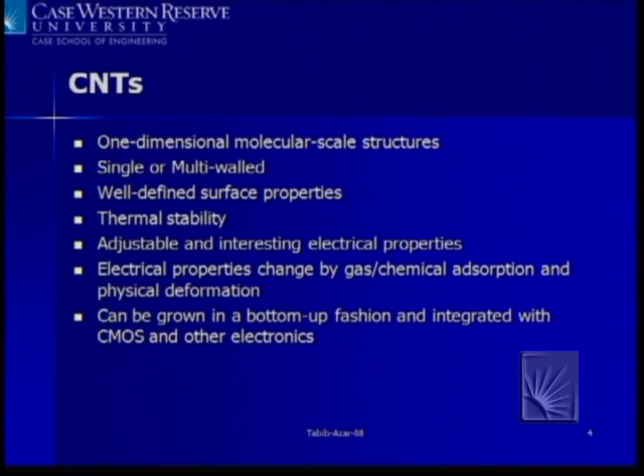So most of the nanotechnology work that I'm interested in and I work on, I don't really want to eliminate anything. I just want to use whatever exists and make them better by adding this nanotechnology stuff.

So key properties of carbon nanotubes are here. So the band gap: you can have semiconducting and metallic ones. Semiconducting ones have a kind of semiconducting-like behavior. So they have a band gap that is kind of proportional to 1 over d, and d is the diameter of the carbon nanotube. And they can withstand large current densities. You can pass large current densities through them, and they don't deteriorate, which is a great thing. And you can now grow them. This is old. We can grow them up to 10 centimeter or so in a continuous manner.

So they're hair-like structures. The aspect ratios are amazing. So you start with something that is, let's say, 1 nanometer or 50 nanometer diameter, and you grow them for up to 10 centimeter. Think about it in terms of aspect ratios. It's a highway that can run around the globe a bunch of times. That's the aspect ratio, right? So they're amazing stuff in that sense, and given that they are very stable and you don't need to do lithography to grow them, makes them really interesting. And they have pretty good thermal conductivity, and they can withstand large strains.

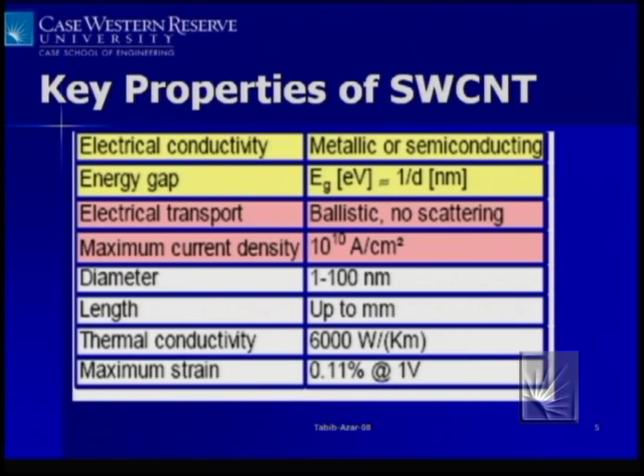So carbon nanotubes have been around for some time, 15 years or so. People have learned how to grow them easily. Most of the work that existed before we got into this was based on post-processing. So you would grow carbon nanotubes using one process, and then you add them to your structures in some fashion. And if you want to do this in a very controlled environment, you need a nano manipulator, atomic force microscopy of some sort. And it takes lots of time, and the yield is very low. So there is no really added value per se for general purpose applications.

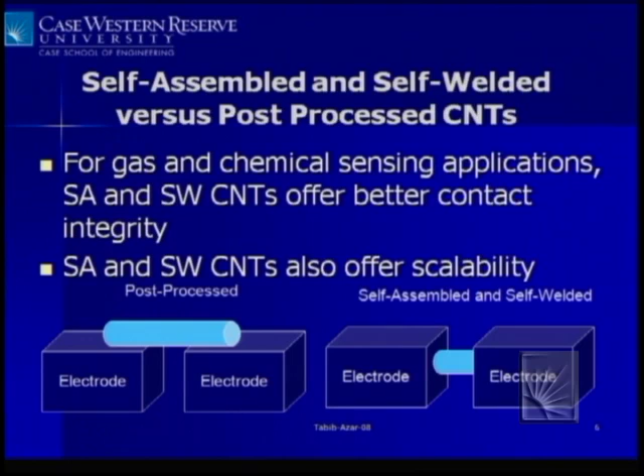What we started doing was to come up with a technique where you can grow carbon nanotubes between electrodes that you define using photolithography. So that way we try to make it more reproducible, less expensive, and come up with applications that readily require that kind of solution. So the technique that we developed, Yan Ji, who graduated a few months ago and is now at Georgia Tech, was one of the key people who developed this.

So the idea is very simple. So you're going to bring in gas and stuff. These are the posts that I showed you. Let me see if I...

Oh, looks like it doesn't want to go back. So these are the posts that I showed you. So what you do is on one wall you deposit carbon, and on the other wall you may want to end up with iron. That's your catalyst.

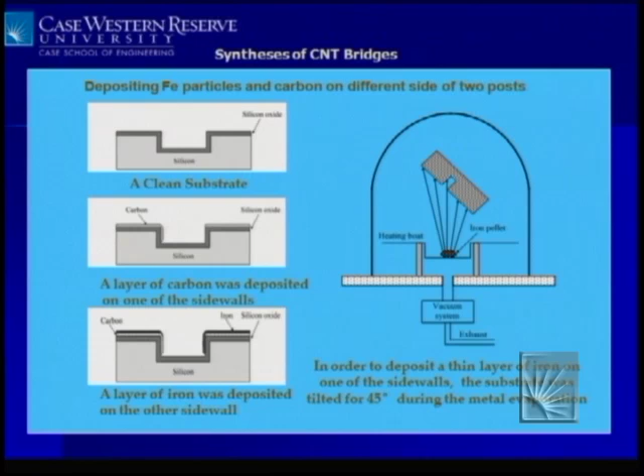And the way you do this is by just tilting the sample over some kind of a heater where you put your iron pellet or your carbon source and evaporate. And you use these different walls to do shadow masking. That way you can end up with different materials on different parts of the device. And you can do this across a wafer, so it is very scalable.

And then the idea is that you put this device with these different layers on different walls inside your reactor and bring in carbon-carrying gases. The carbon-carrying gases can be anything. It can be methane, which is the cooking gas. It can be acetone. We can put a little bit of acetone inside the reactor, and as you heat it up, it starts evaporating. That can be your carbon-carrying gas.

Actually, you don't need much, because just when we talk and stuff, there are all these hydrocarbons and CO2 that are generated by biological systems. That's enough to grow these carbon nanotubes. So you don't need much carbon in the environment to grow them.

You can calculate the number of carbon atoms you need to grow one of these carbon nanotubes. So it is very small, right? The distance between carbon atoms is on the order of 1.42 angstrom or so. And per unit length, you only need a handful of carbon atoms to grow it. So that's interesting in that sense too.

So you expose this to the carbon-carrying gas, and as it comes, the carbon and hydrogen get dissociated, and carbon gets dissolved inside the iron and saturates it, and then the carbon ends up near the tip, and that starts growing the carbon nanotube. This is a pretty accurate model, by the way.

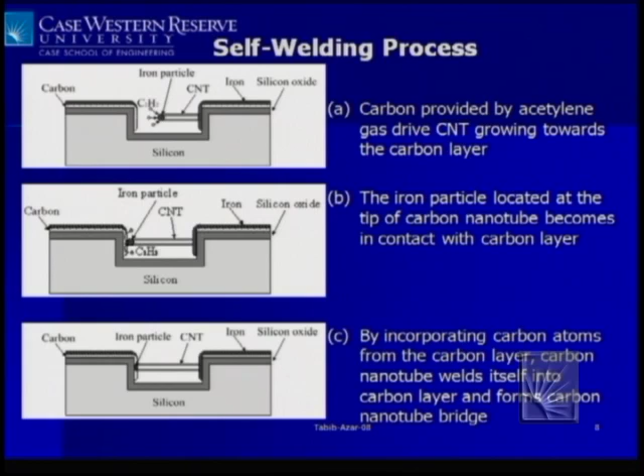People have done this inside transmission electron microscopes, and there are videotapes out there. If you just Google carbon nanotubes, you will see these video clips, and it really grows very nicely. The interesting thing about growth is that you can't really dictate when it starts, but as soon as it starts, it goes very fast.

So typically, what we do is we set the temperature and the flow rates as indicated in there in order to start growing these things, and this is an example of what we end up with. We have done this in 10 minutes, but most of the action happens in a fraction of a second. But you have to put it in there and wait for things to start happening, and that we can't dictate, at least till now. So the whole thing happens very quickly once it happens.

The reason I can see these carbon nanotubes as charged-up white lines in there is because they are charged up. The scanning electron microscopes don't have the resolution to show these things if they don't charge up. So the electron beam comes and charges these up, and whatever electron is there starts repelling the other electrons that are coming. They look bigger, and because of that you can detect them.

So once you grow these carbon nanotubes between these two posts, the posts can provide you with electrodes readily, and you can look at their IV characteristics, current versus voltage characteristics. And you can put a variety of different materials on these walls and make some interesting switches and non-volatile memory devices, stuff like that we have done.

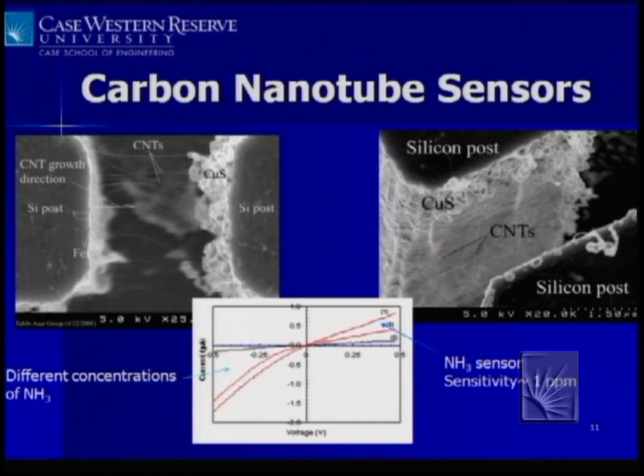This particular trace shows the sensitivity to hydrogen-carrying gases, and you can get the same kind of traces for oxygen-carrying gases. This is an example where copper sulfide is used for solid electrolytic memories for non-volatile memory devices. So if you put copper on the other wall and grow carbon nanotube onto the copper sulfide, the IV characteristics are very nonlinear, and they show very nice separation between off state and on state.

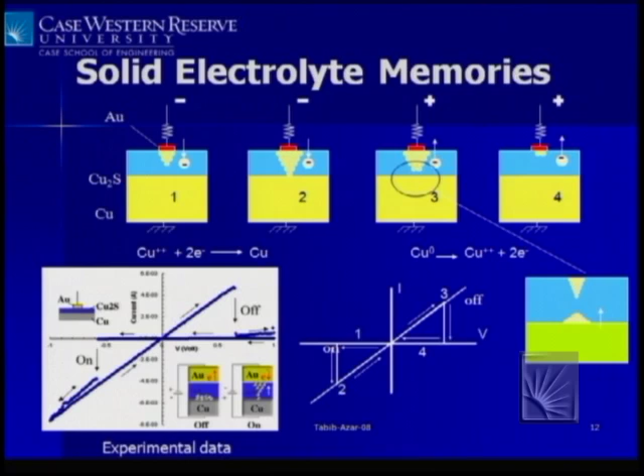We are actually continuing this as part of our DARPA effort on nano-electromechanical switches. This is a cluster approach to nano-electromechanical switches. So it's the ultimate nanomechanical switch.

This kind of shows up front. So copper sulfide cannot be taken up to 700 degrees centigrade or so. So what we did was we grew carbon nanotubes between these two walls. This wall was covered originally with copper, and then after we grew the carbon nanotubes, we took it out and sulfidized the copper. And if you look at some of the carbon nanotubes, they kind of start sagging,

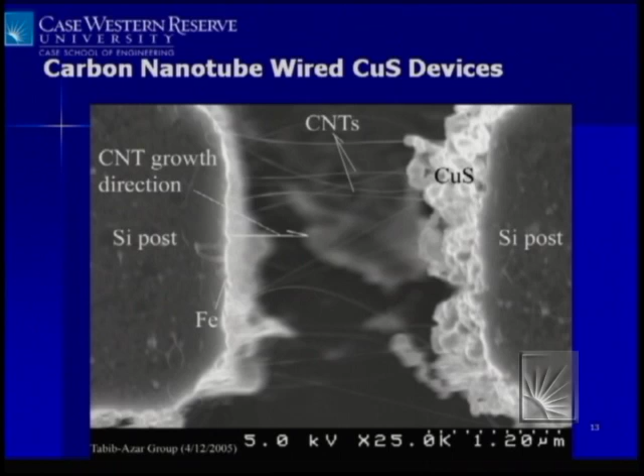because when you take copper and convert it to copper sulfide, the volume increases by a factor of 2. And because of that, the carbon nanotubes are not stretched anymore. They kind of start sagging. These are some of the IV characteristics. I really don't want to bore you guys with lots of these details, but the important thing is that you see this on and off behavior.

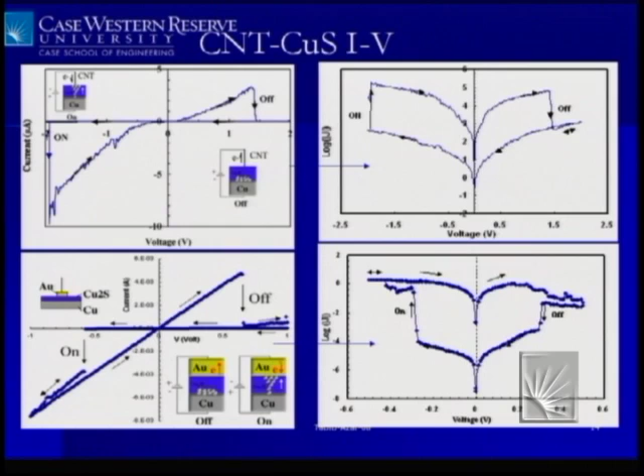And these are the world's smallest area devices that are not done using electron beam lithography or X-ray lithography or some fancy technique. You grow carbon nanotubes onto a functional layer, and you get 3 nanometer squared area. Now try to do that with electron beam lithography, and I'll give you a couple of PhDs before you are done. So they're very challenging problems if you want to do this using electron beam lithography, right?

So you guys that work with electron beam lithography, you know, 30 nanometer you can do, maybe 20 nanometer if you work really hard. 3 nanometer square contact areas are unheard of. And you have to kind of stand on your head and do a whole bunch of other stuff for it to happen. So it's pretty difficult.

So multi-walled carbon nanotubes have some other interesting characteristics. If you hang on to both sides of these multi-walled carbon nanotubes and pull on them, they start telescoping out. And when they telescope out, the carbon atoms on different layers grind against each other, kind of quantum mechanically. And as they do that, the resistance or conductance between these two posts changes periodically, because these carbon atoms are arranged in periodic arrays.

So you can use that as strain gauges with very large gauge factors. And you can use them, for example, to track position at nanometer scale. And there are lots of devices that people are working on. This careful study was done by my friend Alex Zettl at Berkeley, who put these multi-walled carbon nanotubes in a TEM and attached 2 posts. In this particular case, one was an AFM tip.

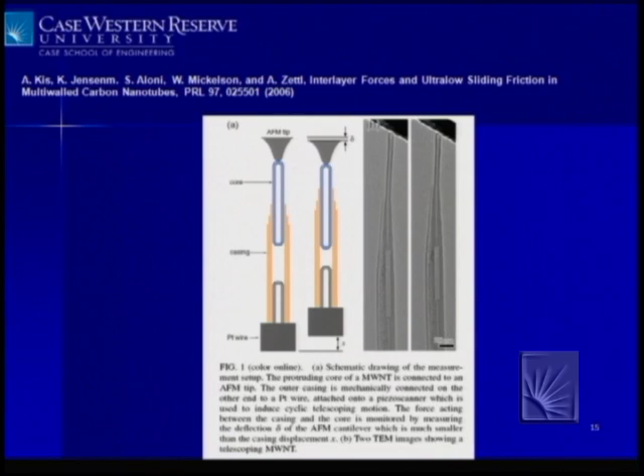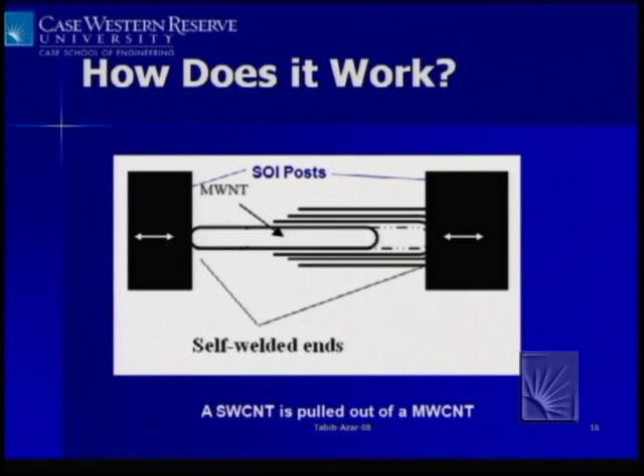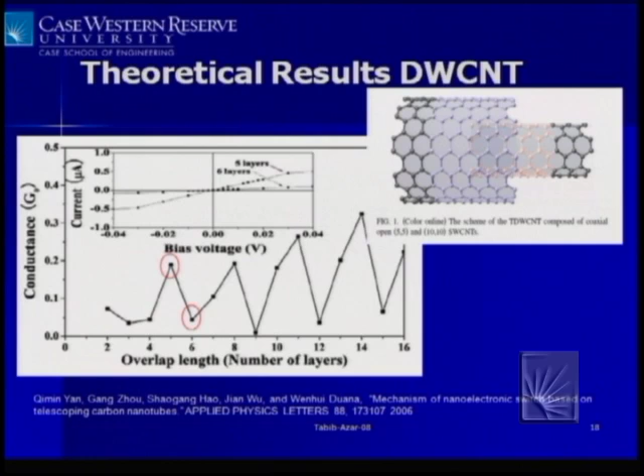And this is a TEM image, so you can see he pulled it, and then they became elongated, and as they telescope out, the resistance changes. There's another theoretical work that was done by a Chinese group, a very careful study, that showed that the conductance basically goes up and down as these different layers are telescoping against each other.

So this was kind of intriguing, but if you want to make a device with an AFM tip in there, that kind of worries me, because then you have to spend $150K on an atomic force microscope to make a strain gauge that you're going to sell for a couple of cents, right? So it was interesting to use our self-assembled, self-welded technique to come up with devices that we can readily make, and they are scalable and reproducible.

So the idea was to use a cantilever beam and put these posts in a strategic location on the neck here. And so when you bend it, this gap opens up, and that enables these carbon nanotubes to telescope out or in, and then you can use the current versus voltage characteristics between those 2 posts to see what's happening.

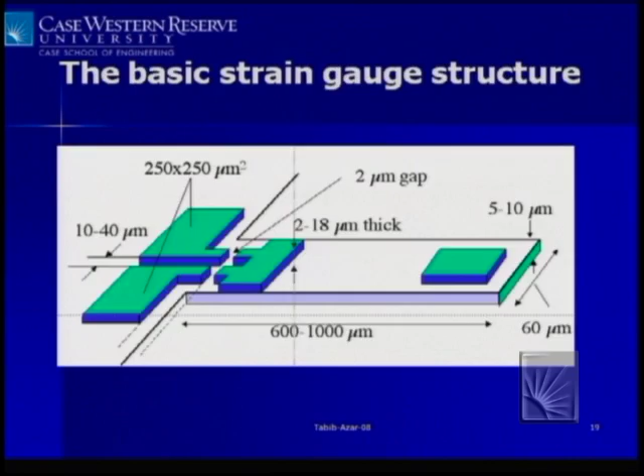Oh. Can we turn off the light? Thank you. Yeah, the danger is that I know that even with lights, I'm going to put you to sleep. Without lights, for sure. And I won't even be able to see what I'm doing, right?

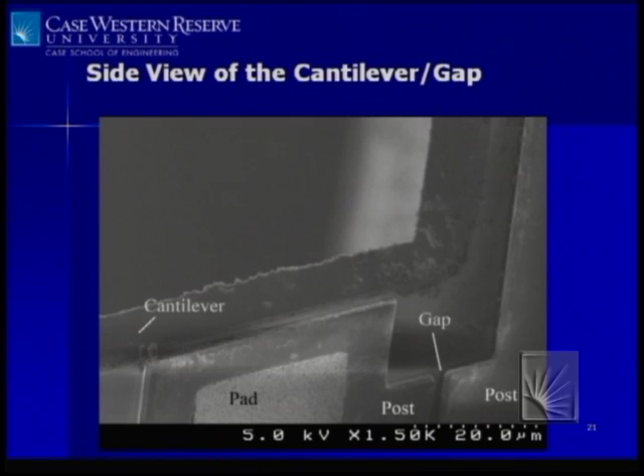How do I get out of this?

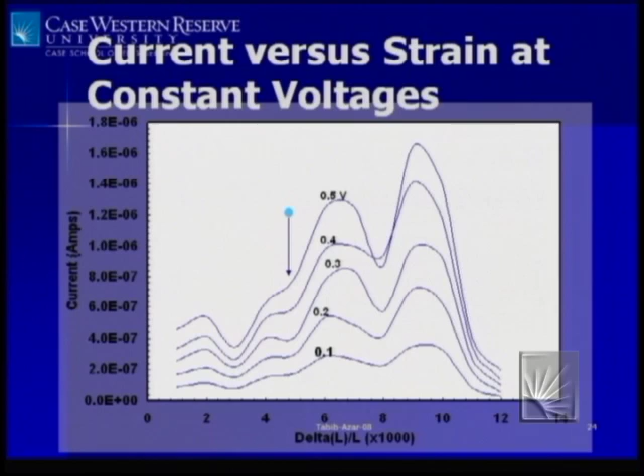These are due to carbon atoms in different layers of multi-wall carbon nanotube kind of grinding against each other. So they kind of go over each other, and then they're kind of in their troughs and so on and so forth. And there is a modulation, and there is kind of an overall change too, which is explained by Andrews et al. It's kind of a 1 over R dependence of the effects that we see in the electromagnetic regime.

You can also do dynamic measurements by vibrating this and trying to detect the vibration spectrum of the cantilever beam by looking at the piezoresistive signal. So this enables you to come up with a piezoresistive sensor that's very small, can be readily grown inexpensively, and it doesn't have the problems of scaled piezoresistors in silicon.

So if you want to take silicon piezoresistors and make them smaller and smaller, as the volume becomes smaller, the statistical fluctuation in doping concentration makes their characteristics vary dramatically from one device to another device. But carbon nanotubes are all the same, more or less. So although they are very small, because of their structure, there is not much statistical variation in their structure.

So carrying the same theme, we became interested in using these carbon nanotubes for nano switches for electronics and sensors. And one of my agendas was to use these as electrodes for prosthesis. So you can come up with brain-machine interfaces where you have carbon nanotubes attached to some electrodes, and carbon nanotubes go inside the cells through these nanopores very easily, and provide you with a mechanism to interact with cells without destroying them, since these are so small. And also they enable you to look at the signals generated by cells.

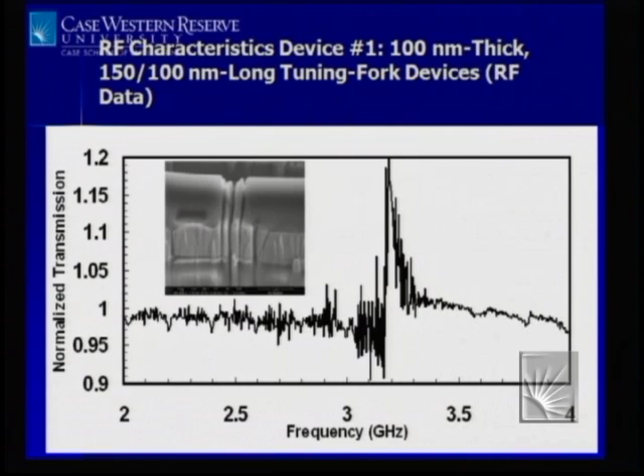Another important thing is that when you have 1 nanometer gap, air molecules don't find it very pleasant to end up there, right? Because their mean free path is about a micron in 1 atmosphere at room temperature, and it is so small a place that you're not going to get many of these air molecules in there. Eventually, they end up in there just because of the tail of the distribution in the energy, and oxidize these contacts and deteriorate the switch. But at least for a couple of days, everything is fine.

I'm going to switch gear now. So from what we learned from these switches and beams, we started looking at some other interesting applications with Dr. Garverick and Dr. Hillel Chiel in the biology department. There was interest in coming up with electrodes that are compliant enough so that they don't tear biological tissues, but at the same time rigid enough so that they're not going to move around on their own, right? And they also wanted something that is electrically impedance matched to extracellular recording of neuron firings.

So we had the carbon nanotube stuff, and we knew how to fabricate these cantilever beams. These things are known, by the way, for about 30, 40 years. And Case was one of the first places that started doing these microelectromechanical structures about 35, 40 years ago, if I'm not wrong. The structures themselves are not new, and electrodes are not new. They have been around for a long time. Actually, this area of doing prosthesis using electrodes has been around since Volta's time.

Volta, the guy who basically discovered the battery effect, was one of the first who had metallic electrodes, accidentally or intentionally, nobody knows, contacting frogs, and frogs started twitching, in the presence of some acidic solutions nearby, lemon juice and stuff like that. So everybody makes these electrodes and sticks them into something, right? So the question was how to make them so that they have the desired mechanical and electrical properties.

Whenever I don't want it, it works. Should I just do this? Previous, yeah. I think I got it working. For some reason, it doesn't want to go back.

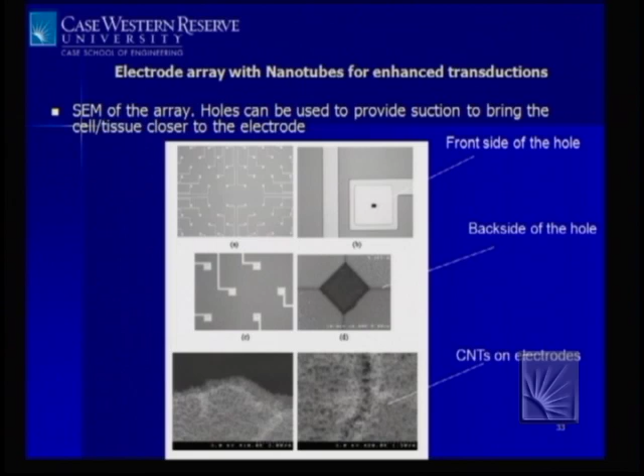Oh, OK. So these electrodes, we have a whole bunch of them now, and they are seeing about 500 of those neurons. And we added these hairy layers on them. These are carbon nanotubes grown in a very simple low-pressure chemical vapor deposition system. You can see we can cover them uniformly with these carbon nanotubes, and they increase the surface area tremendously.

So here is the objective for the sea slug project, by the way. What we want eventually to do with Dr. Garverick and other collaborators is to embed these electrode arrays with wireless telemetry and maybe energy scavenging capabilities into the sea slug. When the sea slug decides that he or she is hungry, we want to push a button externally and convince the sea slug that no, he or she is well fed and wants to do something else. And do the opposite. If we can do that, then we feel that we have fully understood the neural circuitry in the brain.

By the way, there are many other interesting applications, like Steve Garverick is our associate chair. So if you want your grade to be approved, if you have one of these devices, then you can find some applications there, right? So you can do kind of remote control of people, eventually. But that's just a joke. Don't take it too seriously. I don't think that Dr. Garverick will let you do that.

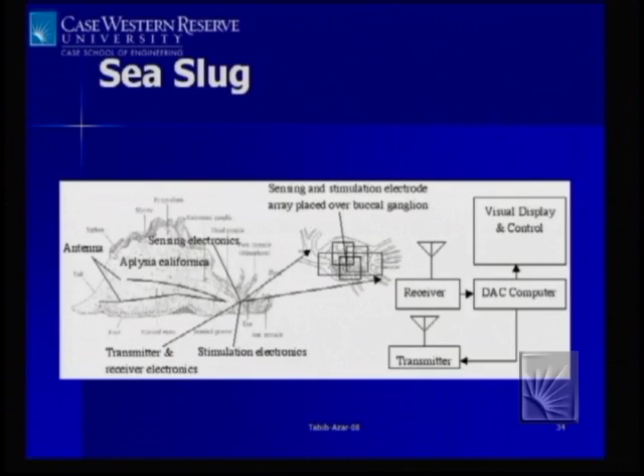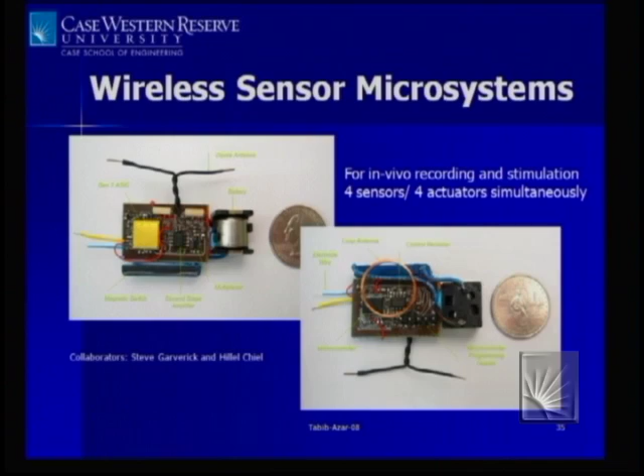And this is Dr. Garverick's circuit there that enables you to do bidirectional telemetry, I believe, right? My collaborators are Steve and Hillel on this. And the idea is to be able to both read and actuate these neurons.

I'm going to, again, switch gears a little bit and talk to you about telemetry from my point of view. I'm kind of an analog device, circuit device, nanotechnology person, so I like to keep circuits very simple. Talking about wireless telemetry, there was this opportunity to come up with harsh environment sensors that can detect UV light inside the engine. So we came up with these oscillators with silicon carbide devices that are well suited for harsh environment because they have a band gap of about 3 eV,

and they are very rough materials. Silicon carbide is used in abrasive cloths for grinding and has lots of industrial applications. Now, this silicon carbide is not the same kind of stuff that you find in abrasive materials. It is single crystal, and it's pretty expensive, about $14,000 for 2-inch wafers from Cree. But nonetheless, we have made integrated circuits using silicon carbide, and discovered that you can have UV-sensitive optical field effect transistors, and this shows the UV sensitivity of these FET transistors and their response to different types of UV.

So I thought that I mentioned this to you, and then we looked at the power consumption and discovered that it is not that good. So the next thing to do was to use a tunnel diode. Tunnel diodes are interesting devices. They have very nonlinear IV characteristics, and they switch on and off.

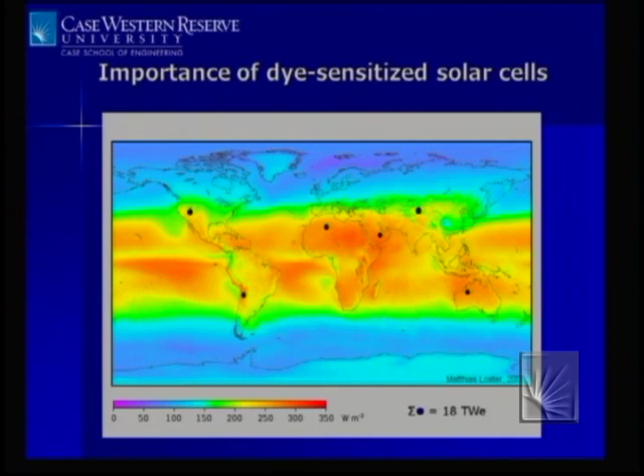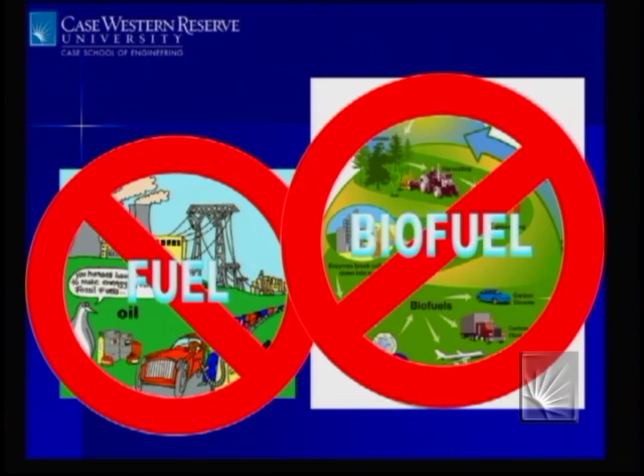To compare this to biofuel, biofuel is 0.04 watts per meter square. So it is very, very small compared to what you can get out of sun. So it makes lots of sense to go solar cell. One of my students, who I think is back in Thailand, made this. Fuel is bad, because it's expensive, lots of politics involved with it. It's bad for the environment. Biofuel is also not that good because it is very inefficient. 0.04 watts per meter square of all these cornfields. You have to convert lots of corn to make up for a little bit of this. And solar energy is for free.

So there are many hands in this game. There's Martin Green in Australia, who is a world authority in solar cells, and there are a whole bunch of people who are working on solar cells. It has been around for a long time. NASA Lewis Research Center, which is the granddaddy of NASA that we have right now, was one of the pioneers of improving solar cells for space applications, and lots of colleagues at CASE have worked on this problem for a long time.

What is new in the solar cell field is, again, using nanotechnology in order to make them inexpensive, more efficient, and out of materials that are readily available. So that's the idea.

So titanium oxide, which is used in powders and paints and all that, is a dirt cheap nanotechnology material that's available. And people have started looking at using titanium oxide, which is produced by the ton, even in Cleveland, right, to make these solar cells. The way it works is kind of interesting. There are two types of solar cells, p-n junction based and these dye-sensitized nanoparticle based.

The p-n junction based, you basically have a built-in electric field inside the device. You shine light, you generate electron-hole pairs, and the built-in electric field separates them and produces a current out in the external circuit. Now, for that, you need high crystallinity. You need a very small amount of defects inside the material, so it makes it expensive, right?

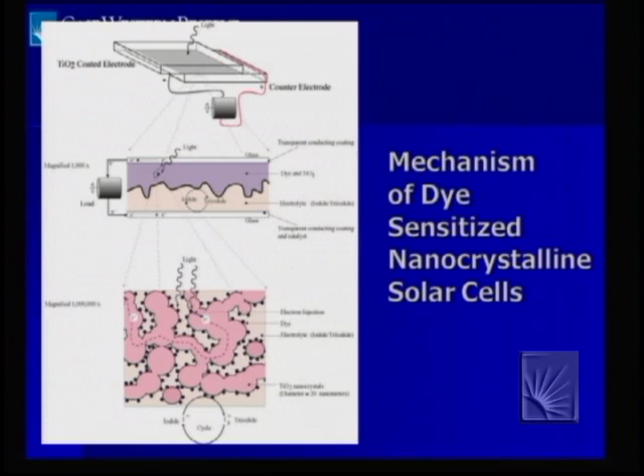Type 2 solar cells work based on a different principle. So you can think of these p-n junctions kind of distributed among individual particles, nanoparticles. Then you have to come up with a way to harvest all that energy in different forms. So we started looking at this problem, and it made sense to not have only one type of energy conversion device based on these nanoparticles, but have 3 layers.

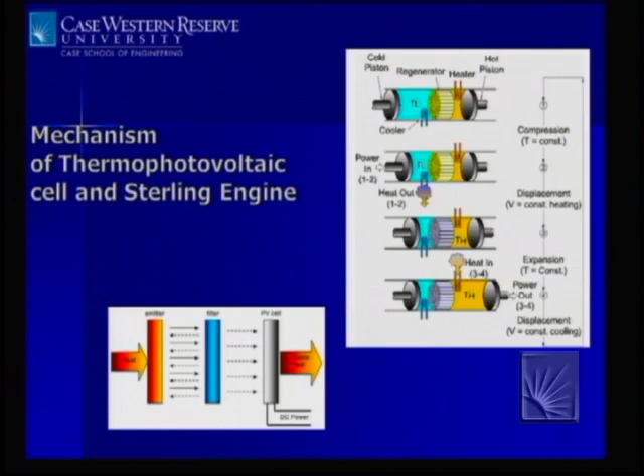So the top layer would basically get the photons converted to electricity. The second layer, probably you want to have some kind of thermophotovoltaic devices, maybe a thermoelectric type of approach. And the third layer to have a Stirling engine in order to be able to get most of the energy out of the sun.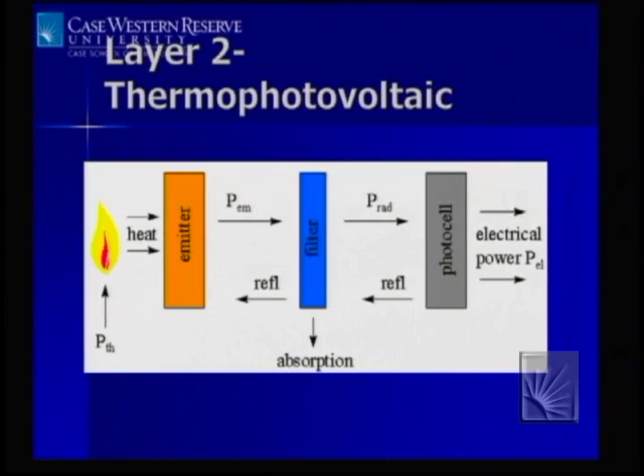I'm not going to go through the details of all these different parts of the solar cell that we have, but this is just for those of you who are interested. You can see these and then see me at the end, and I'll give you references on this.

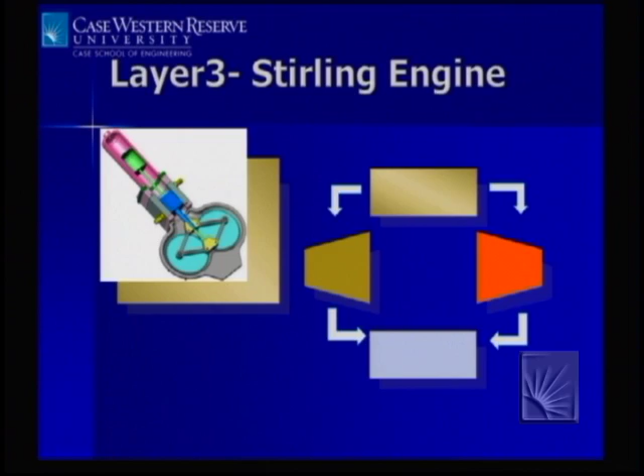And the last layer, we want to put in a Stirling engine. A Stirling engine is really an interesting, very high efficiency engine, and you can make them in very thin layers. And once you do that, then this stack of 3 different layers, each layer is inexpensive, and they can be basically molded onto each other, can provide you with a wide coverage of most of the energy in the sun's spectrum.

So we need to know the winners. We need to know which nanoparticles are good at this kind of conversion of photons to electricity, and which nanoparticles are not good. So in one shot, we can do many, many experiments in parallel. All we need is the right tool that we have, the conducting AFM setup in our lab on the 7th floor in Glennan, to go to different nanoparticles and look at their characteristics under illumination.

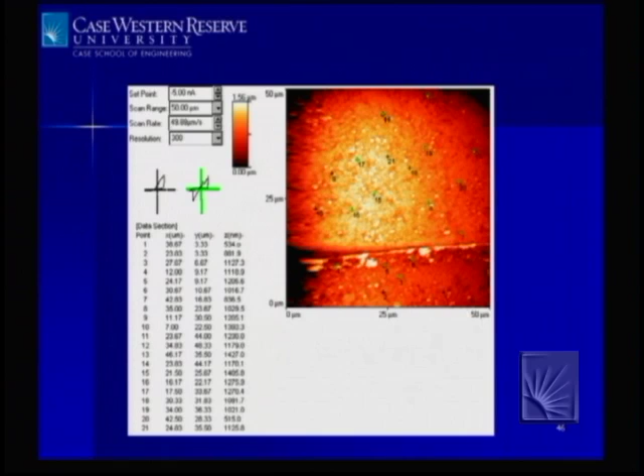So for the diversity, what we can do is to look at their spectral response. And spectral response of number 15 may be good around 2 eV. Number 17, which is bad around 2 eV, may be good at 1 eV. We can also do that. So in a very engineering manner, we can select number 15 for 2 eV, number 17 for 1 eV, and the rest of them to cover the whole spectrum, you see. So that's what we are doing.

So now, it's not as good as it looks, actually, because these structures are not very stable. So one of the research that we are doing is to come up with a way we can grow them bushy, we can grow them lean, we can grow them mean, we can grow them any way that you want by choosing the voltage and the frequency and the concentration of the nanoparticles inside the solution.

Now, I'm not going to bore you guys anymore than I have to, right? It's always a pleasure to give one of these talks. You see, I'll threaten you with something. And that is, if you don't ask questions, I have a few more presentations with me. So let me just fire up and see if there are any questions.

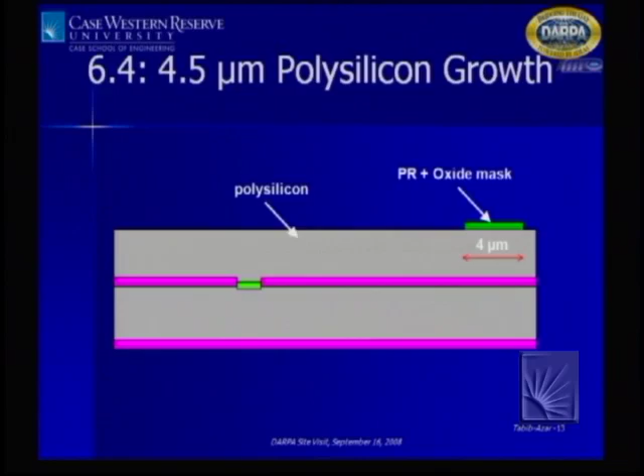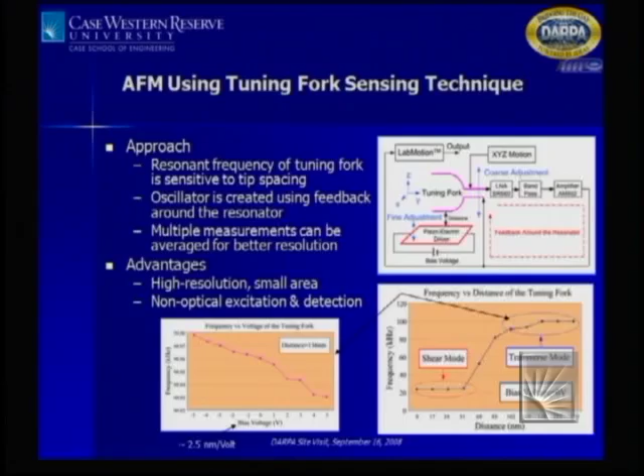So actually, I want to go to something else very quickly, and then I'll let you guys go. You know, I decided instead of giving you lots of formulas and equations and numbers and stuff that I'm sure you get plenty of in Dr. Garbrick's class, to give you something exciting, right? So we have been working on these.

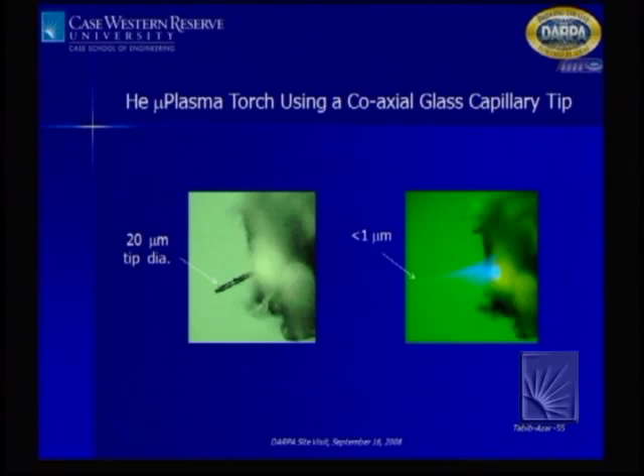So one of the very controlled ways of growing these carbon nanotubes and a variety of different materials is using something called tip-based nanomanufacturing. And how can I turn this off? Yeah, if you can turn it off, if it can be turned off. This is kind of first in the world, actually, I think.

So we are coming up with these very, very fine nozzles and probes to generate these plasmas to deposit nanoparticles in a very controlled manner or etch them and stuff like that. This is very preliminary work. I just want to show you the kind of scope of things that we are working on. This is also supported by DARPA, as you can see there. And we are getting some very interesting results. I think a bunch of people in the audience are involved in this project.

So the idea is to bring in, let's say, methane through this nozzle and use this plasma to grow carbon nanotubes exactly where you want and make it scalable. So these are two different types of plasmas. They're based on helium. One is positive and the other one is negative. And you can do different things with them.

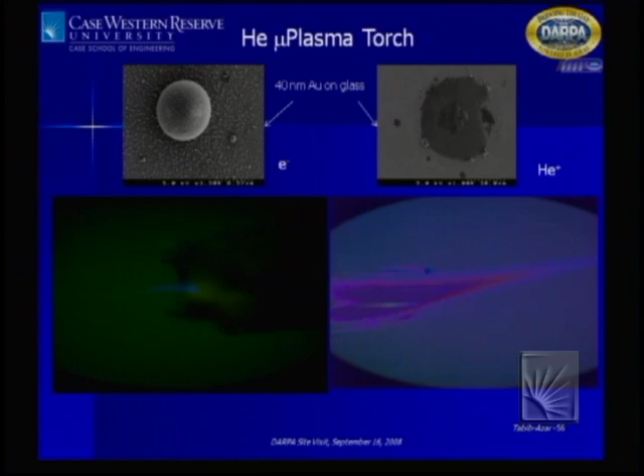Before I let you guys go, since I have like, what, 10 more minutes? There may be questions. Well, I'm trying to avoid questions, maybe. Well, OK. So maybe we can start the question and answer process. And I have one more thing to show, which I think you guys will like. Actually, I'm trying to solicit people who may be interested in that. I know that one person is interested, but let me just put that up. So if anybody wants to ask questions, hopefully I'll be able to answer.

Yeah, I mean, while you guys are asking, maybe I'll explain this quickly and then we can move on. There is an interest, again from the energy point of view, to come up with micromotors that are very efficient, and you can use them in a variety of applications to steer micromirrors in different directions, or using microfluidics for pumping.

Actually, there is a pumping BAA coming out, so you guys may be interested to put these micro pumps on chips, so that you can put these analytical tools on chips, so you can do mass spectroscopy or look at pollen count in the air or some allergens that you may be interested in. And you can use these in order to push things or pull things.